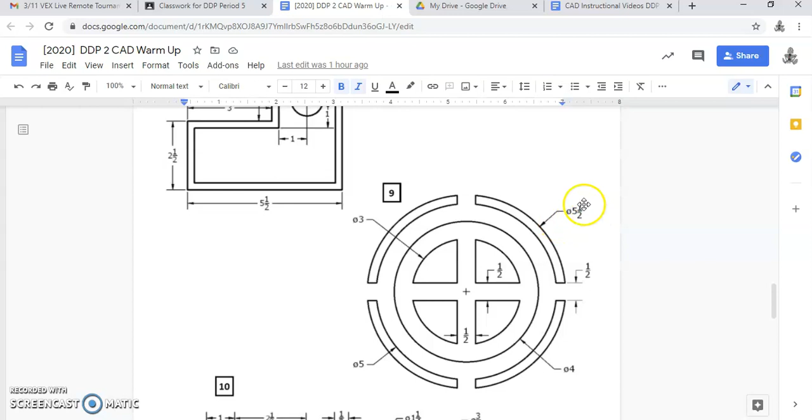The next drawing we're going to use to brush up on offset, trim and extend skills is object number 9. This one's going to be a little less involved than object 8. It's just a matter of understanding how many circles there are and what the diameters or radiuses are, and using the center point of focus to build the drawing. So let's move over to the CAD screen and start.

If I look at the numbers here, I'm going to start from 0,0, and a lot of times you're going to want to use snap in order to work off the center. So I have to draw a circle here, here, here, here. So there's 1, 2, 3, 4 circles.

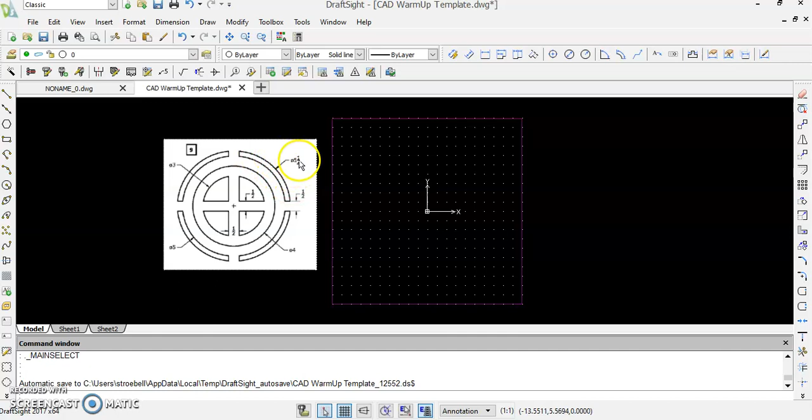Now if we move off of the center point, we're just going to be offsetting lines. I'm going to show you how to do that. Let's start with the 2 outside circles, 5.5 diameter - that's what that symbol represents - and also the 5-inch diameter. We'll start with those two.

I'm going to click on circle. I could either snap right to my center point - as you can see down here, it will show you 0,0 - or you could type 0,0. I'm going to type D for diameter. 5.5 will be the first circle I draw.

Now I'm going to repeat that. Circle, I'm going to go right from 0,0. D, enter, that diameter is 5. There it is. Now I want to make these openings.

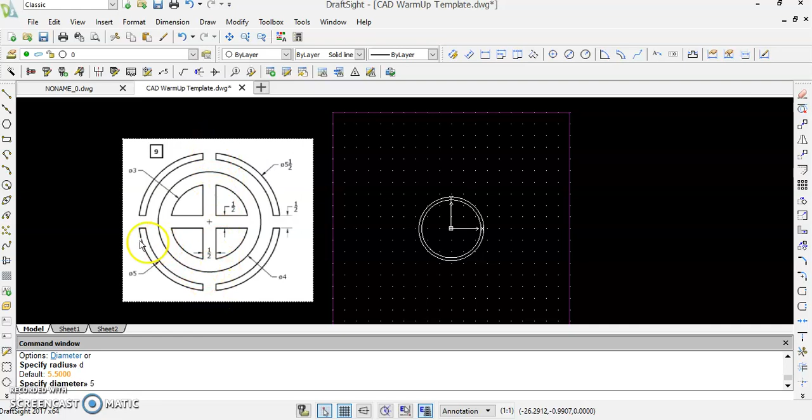So if I look at how this is going to be, I'm not going to try to figure out where these are - I'm going to go off of the center. I'm going to draw 2 lines from the outside of each circle. I'm going to do that again, and snap is allowing me to go right from the center here.

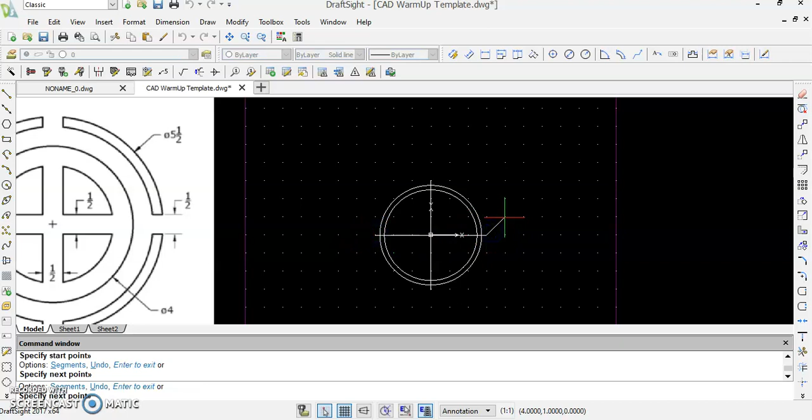Okay, now before I go too far, what I'm going to do is offset. I want to know this distance is a 1/2 inch. So in order to do this, you want to be careful here. A 1/2 inch wide - if I'm at the center now, this line is a 1/4 inch to the right, this line is a 1/4 inch to the left.

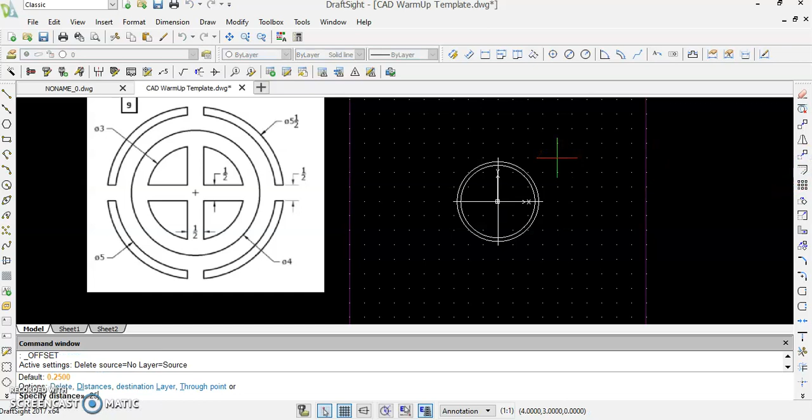So I'm going to offset 0.25, or you could type 1/4. One side, and then the other side. And I'm going to keep offsetting because I'm going to do this again at the bottom and the top.

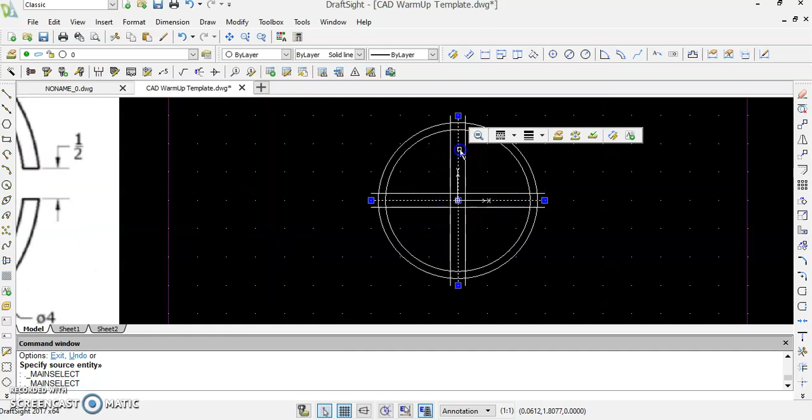Okay, so before there's too many lines where it might get confusing, let's get rid of this line and this line. And then if we want, we could trim out some things in the center. So I usually zoom out, highlight everything I don't need, in fact. And I'm going to turn off snap here - the reason I'm going to turn off snap is because sometimes it's hard to navigate.

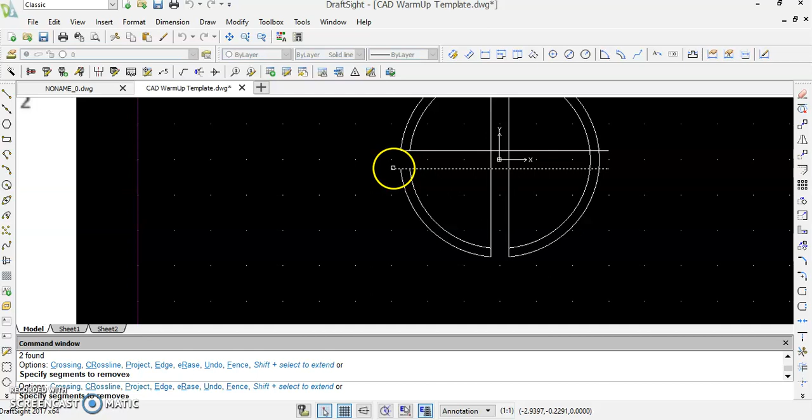I definitely want to get rid of these. You can see how I'm clicking and dragging a box - that works out pretty well. But I'm not going to delete everything just yet because I still need these lines. I'm just going to get rid of this stuff right here. And I can get rid of this, this, this, and this. So you can see how it's starting to form.

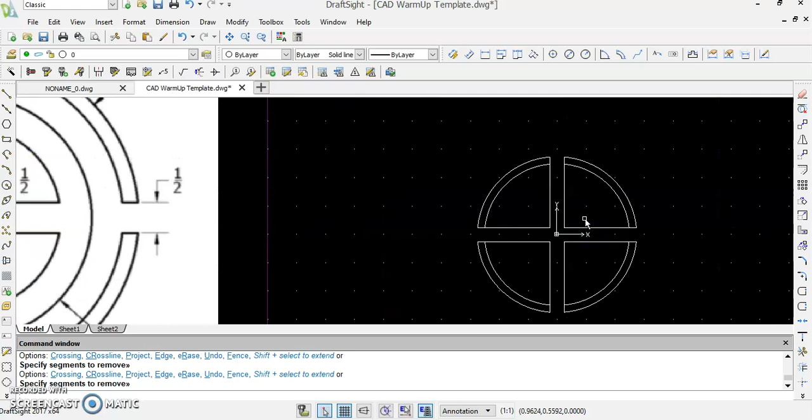So now I have 2 more circles to draw, which is this circle right here, a 4-inch diameter. I'm going to click on circle, snap to my center, D, enter, 4, enter. Okay, that's 4-inch. Nothing needs to be trimmed out of it.

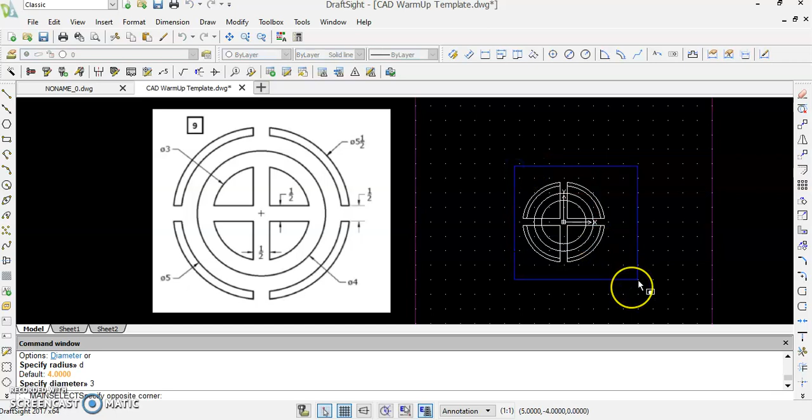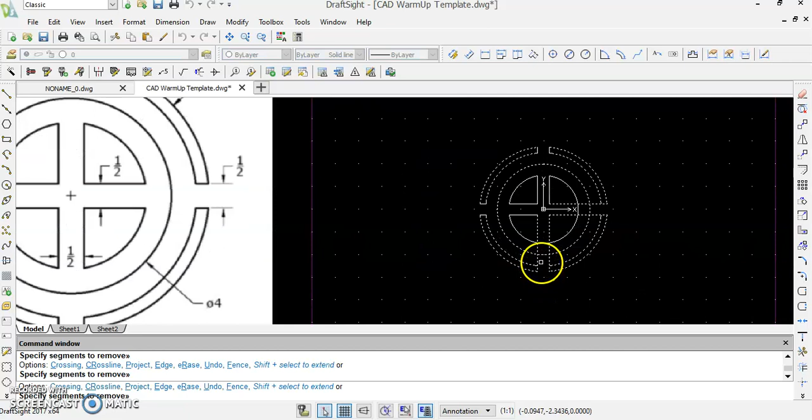And then finally the inside circle, that's a 3-inch diameter. Again, circle from center point, D, enter, 3, enter. Okay, and then again, I'm going to highlight everything I don't need, including everything I do need, and I'm going to get rid of things like this. So it's a matter of just seeing the pattern and understanding the shape and understanding the lines that you want to get rid of.

And there it is, that's our shape. So what we'll do is we'll let you finish this drawing, and we'll show you later on how to take a screenshot and put that into your Google Doc.